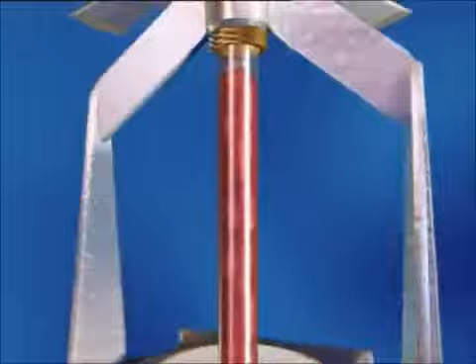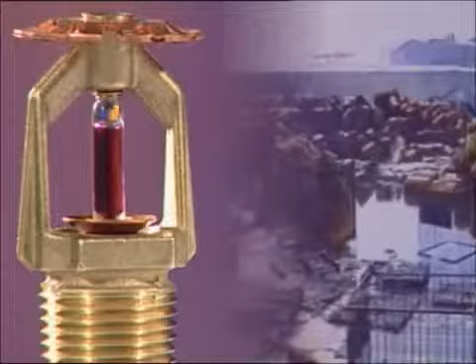Fire sprinkler systems were invented over 120 years ago. Since then, several hundred million sprinkler heads have been installed throughout the world. In that time, they've effectively protected thousands of buildings, helped to prevent the financial collapse of numerous businesses, saved countless lives, prevented innumerable burn injuries, and protected the environment from catastrophic fire-related pollution. They're universally acknowledged as the most effective first line of attack against fire.

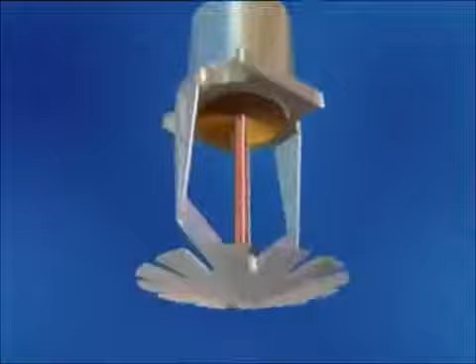The world's first rules for the design and installation of automatic fire sprinklers were written in the UK by John Wormald in 1885. Fire sprinkler systems in the UK are generally designed in accordance with British Standard 5306 Part 2 and, in some instances, Loss Prevention Council (LPC) rules for automatic sprinklers. American rules may sometimes be used, being Factory Mutual or National Fire Protection Association.

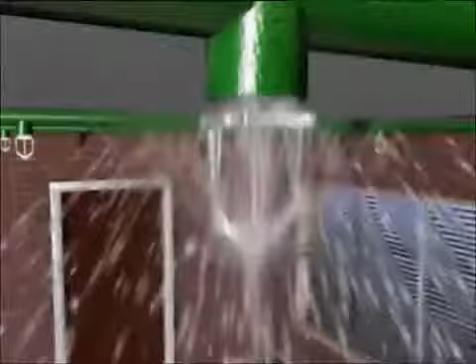Sprinklers are designed to cope with the fire risk presented by each individual building and may also be specifically configured to save lives. Water still remains the most effective firefighting medium available. Sprinklers will deliver water right into the heart of a fire during its early stages through a specially designed sprinkler head. Sprinkler heads are unique. They automatically detect a fire, discharge water right into the seat of the blaze, and operate a local alarm. They can also operate a remote alarm to alert the fire brigade or other emergency centre.

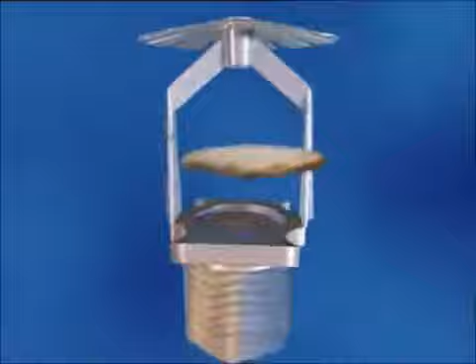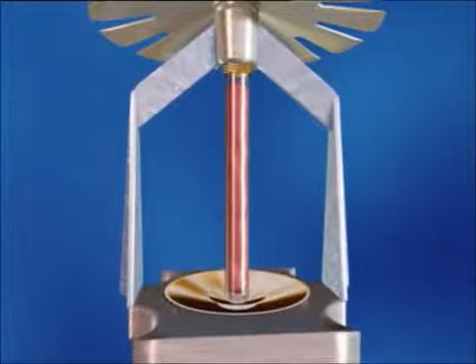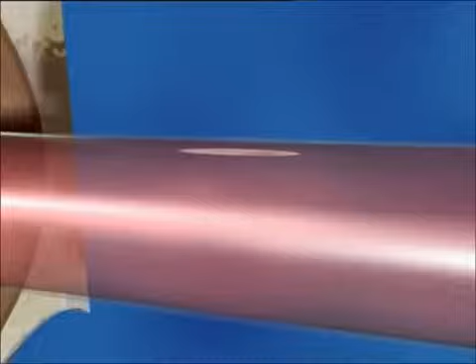A typical sprinkler head comprises a threaded body to connect to pipework, with a valve seal to hold back the water. The valve seal is retained by a glass bulb which contains a liquid that has a high coefficient of expansion. A small measured quantity of vapour remains trapped when the bulb is hermetically sealed. When the liquid expands under the influence of heat from a fire, pressure in the bulb rises until the vapour is compressed. Further increases in temperature cause a rapid build-up of pressure sufficient to shatter the bulb, releasing the valve seal and allowing the water to flow onto a water distribution deflector. This results in an even distribution of water droplets in a predetermined pattern over the fire.

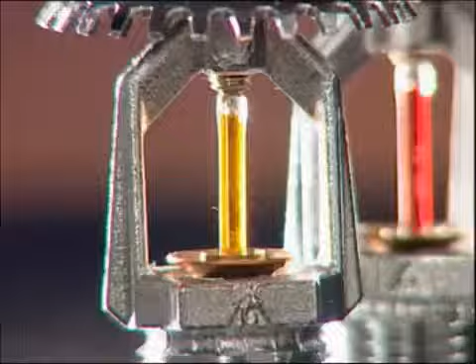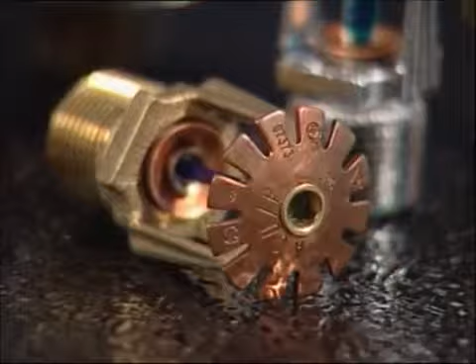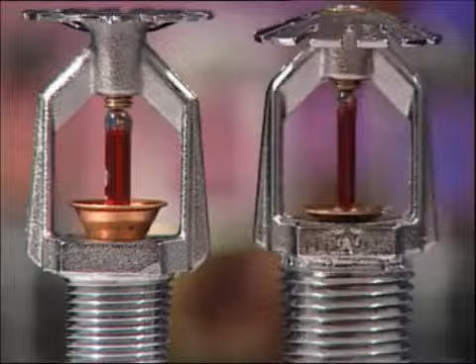Sprinkler heads are available in a variety of operating temperatures, which are identified by the colour of the bulb. The specifier has a vast array of sprinkler heads available to him. Each type of head is designed to cope with different fire risks, different operating temperatures, and different operational requirements. The British Standard defines fire risks as light hazard, ordinary hazard, or extra high hazard. Generally, as the hazard increases, so does the water discharge or density discharge.

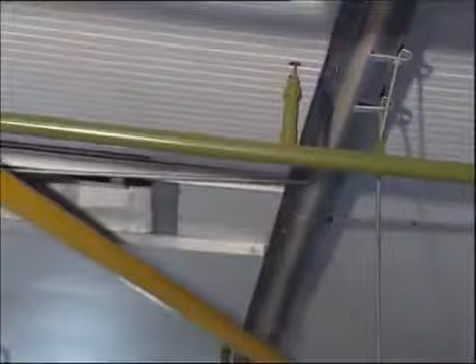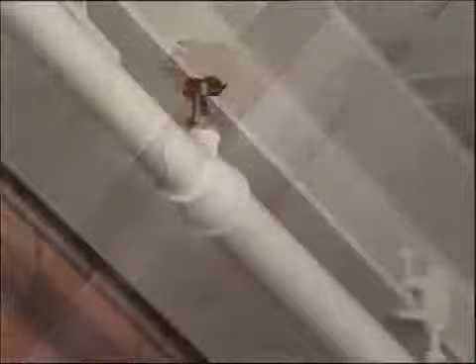Conventional sprinklers can be mounted in either the upright or pendant position, with a deflector designed to spray a proportion of the water discharged onto the surface of the ceiling. Spray sprinklers in upright or pendant positions are used for applications where all the water needs to be discharged downwards. Sidewall sprinklers are primarily used to keep ceilings clear of pipework for aesthetic reasons or to avoid having to disturb existing ceilings when installing. Each sprinkler protects up to 17 square meters in light hazard fire risks and 9 square meters in ordinary hazard fire risks.

Sidewall sprinklers with extended coverage are specifically designed to give an extended coverage of water distribution, with one sprinkler able to protect an area of up to 21 square meters. This type of sprinkler must have a quick response bulb. In a fire, few deaths result from direct contact with flames. The greatest threat comes from inhalation of the products of combustion, such as carbon monoxide, hydrogen cyanide, hydrogen chloride, other toxic gases, and the associated heat.

The reaction time of quick response sprinklers minimizes the life-threatening levels of toxic gases and temperatures. In many environments, there are people who cannot escape without assistance, such as in hospitals or homes for the elderly. Quick response sprinklers provide valuable time for those in charge to assist their escape.

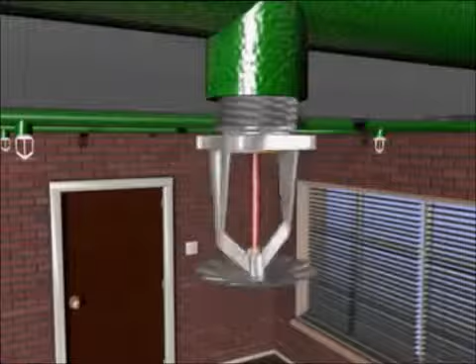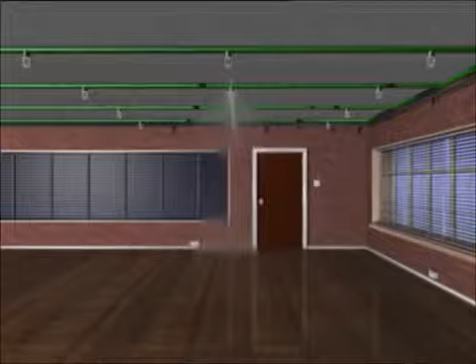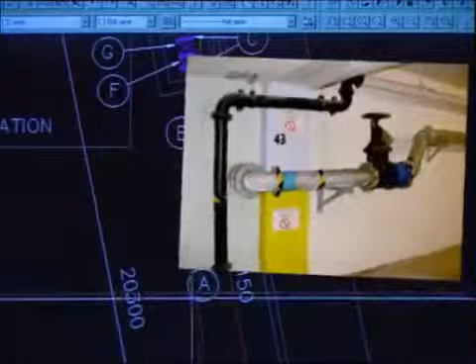A sprinkler head is connected to a water supply via a network of pipes fed throughout the building. The area protected by each sprinkler head can vary from 9 square meters to 21 square meters depending on the fire risk. The pipework is hydraulically designed to ensure the correct flow and pressure of water is maintained at each sprinkler head. The water supply to the system can be fed from the town main for light to medium fire risks, such as residential, offices, hotels, and light manufacturing and commercial occupancies. For high fire risk areas, such as heavy manufacturing and warehouse storage, a pumped supply from a water storage tank or reservoir is normally necessary.

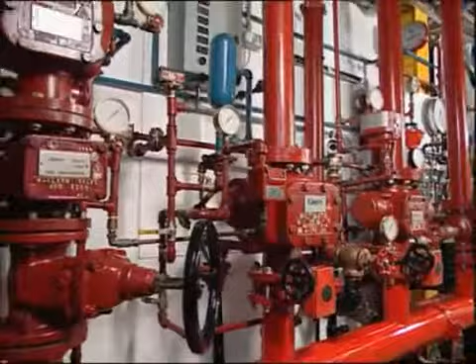The design requirements are specified in the British Standard BS 5306 Part 2 and LPC FM or NFPA design rules. A control and alarm valve automatically delivers the flow of water to the sprinkler heads. There are generally 5 types of sprinkler system that all require different valve arrangements.

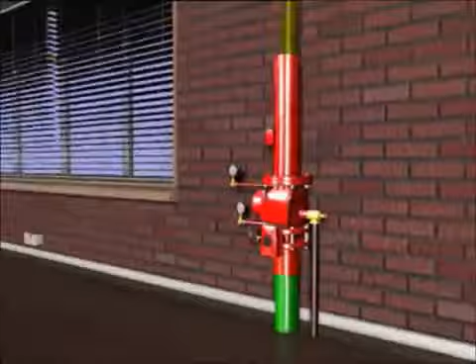A wet system is where the pipework is permanently charged with water and used to protect premises where temperatures are unlikely to fall below freezing point. Where the ambient temperature may fall or be below freezing point, the presence of static water in the sprinkler pipes is clearly undesirable. In this situation, a dry system can be installed in which the pipework is charged with compressed air. When a sprinkler operates, the compressed air is released and the control valve opens, allowing water to flow into the pipework and to discharge from the operated sprinkler heads.

An alternate wet and dry system, as the name implies, allows the system pipework to be alternately charged with water in summer and with air in winter, when there is a risk that the ambient room temperature can fall below freezing.

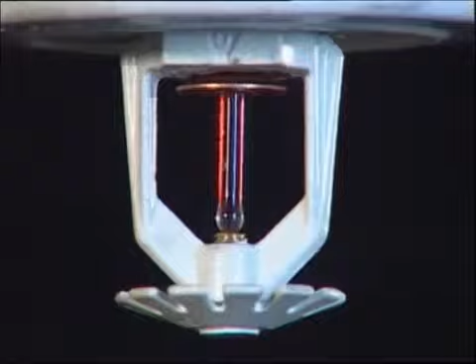Pre-action systems are comprised of a standard sprinkler system and an independent electrical system of heat or smoke detectors installed in the same areas as the sprinklers. On receipt of a signal from 2 or more detectors, the main control panel automatically opens the control valve, allowing water to flow into the sprinkler pipework. Water is only discharged when the individual sprinkler heads reach their operating temperature. Any physical damage to a sprinkler in a non-fire situation will not result in water discharge, but will cause both visual and audible alarms to be raised at the main control panel only.

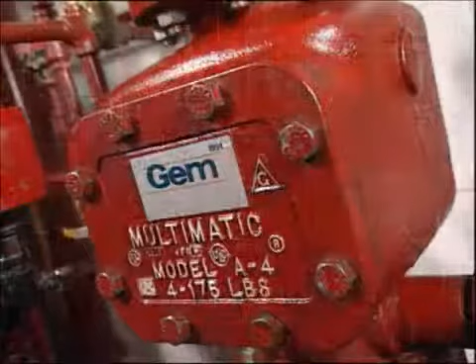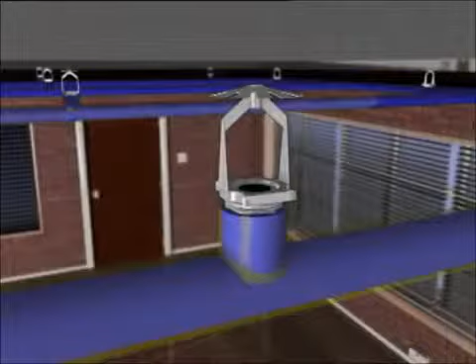A deluge system, unlike any other typical sprinkler system, is designed specifically for high-hazard applications with fast fire growth potential. The deluge valve is actuated by a separate detection system responding to a fire. This brings a large number of open sprinklers into action simultaneously throughout the protected area.

The successful performance of sprinkler systems has been detailed in records from across the world, paying testament to their outstanding reliability and effectiveness. In Australia and New Zealand, where it's a requirement that all fires must be reported, records reveal that over a 100-year period, sprinklers successfully controlled 99.5% of fires in sprinklered premises. Statistics collated in Europe over the last decade are remarkably similar, showing that in fully sprinklered premises, 99% of all fires have been controlled by the sprinkler system.

The reason sprinklers are so effective is because they attack the seat of the fire before it has time to grow and spread. There's no excessive use of water. In Germany, for example, 86% of fires in sprinklered locations have been controlled by 5 or fewer heads. In the UK, it's reported that of the fires in sprinkler-protected buildings over a 10-year period, almost half were controlled by 1 or 2 sprinkler heads only.

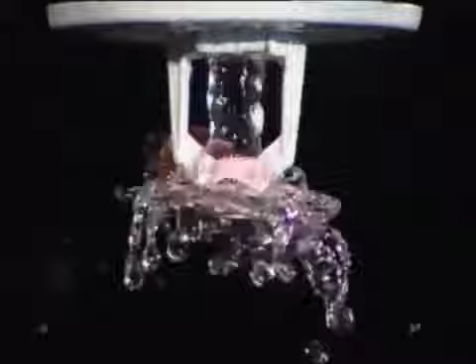Fire brigades, local government authorities and politicians alike have all seized upon these statistics. This has generated numerous campaigns for sprinklers to be installed in applications that could only ever have been dreamt about when sprinklers were first commercially launched over 120 years ago. That's because sprinklers are unique. They not only detect a fire and raise an alarm, they operate to control it and in many cases extinguish the fire before the arrival of the fire brigade. Only the sprinkler heads closest to the fire operate.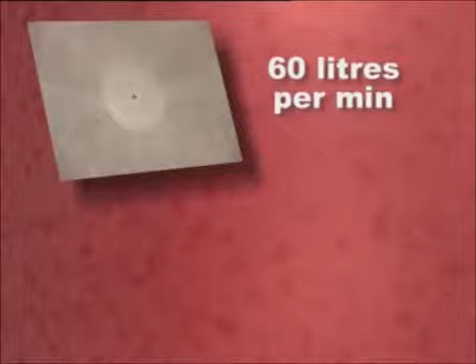Water is discharged by a sprinkler directly onto a fire at a rate of a minimum of 60 litres per minute, in comparison with an unsprinklered building where the fire brigade using only 1 fire hose could discharge 500 litres per minute. The fire will also be much larger, as it will have grown for at least 10 minutes before the fire brigade arrive, so the likelihood is that more than one hose would be used.

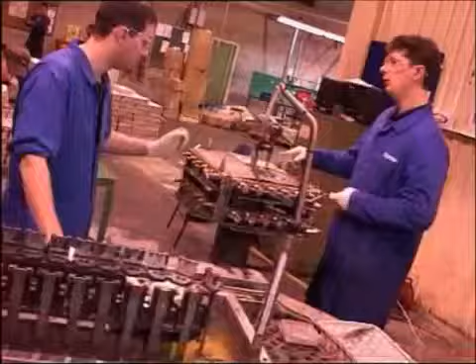Worldwide research shows that of the 40 million sprinklers installed every year, only 2 may operate accidentally. This is because every head is individually tested before leaving the manufacturer. Sprinklers are economical to install. For example, in the case of office blocks and hotels, the sprinkler system would cost about the same to install as a quality carpet for the equivalent area. Sprinkler systems will have a lifespan of at least 25 years, probably 50 years. Some systems are still in use today that are over 120 years old.

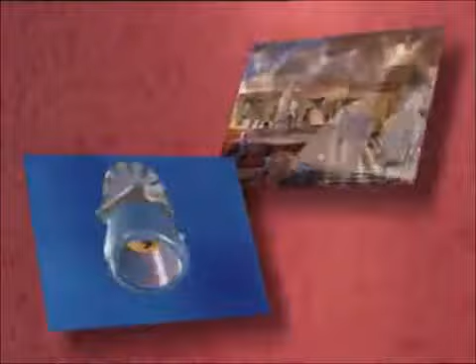The threat from fire will never change. It will always be with us, endangering life, property, and the environment we live in. Fire sprinklers will protect us and future generations. Fire sprinklers. Protection for life.